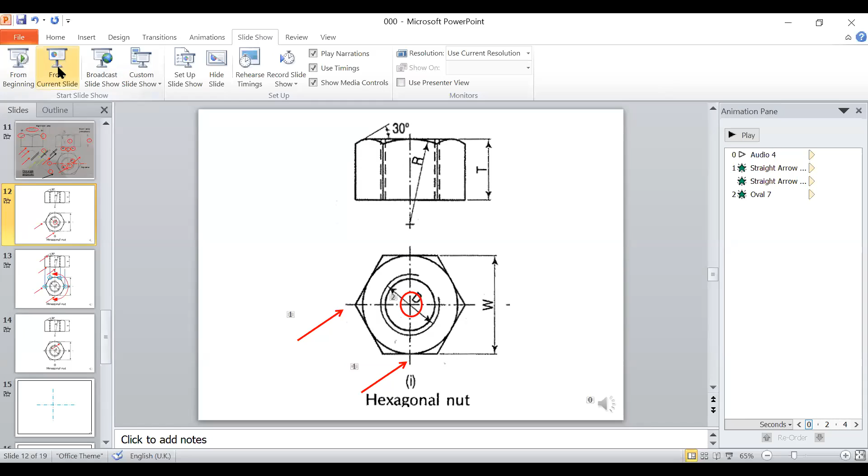Well, in the following slides, I'm actually going to illustrate how a hexagon nut is supposed to be drawn. A nut and a bolt is in fact one of the most important members of any mechanical assembly and is going to be required to be drawn in practically all of them. So the students may kindly note how this particular thing has to be drawn.

The first thing is we are going to start from the top view. We are going to draw the two axes in the top view, and obviously these two axes are going to be intersecting. So the axes have been drawn corresponding to the convention used for central axis. Therefore, it consists of a long hash, a shorter one, then a longer hash, and so on. Kindly note that these two central axes are intersecting corresponding to their longer hashes. This in fact is one of the sign conventions and it has to be properly taken care of.

Now once these two axes have been located, the position of the nut is going to be fixed in the top view. It cannot move left, right, up or down. Well, the nut in the top view cannot move in the left, right, top or downward direction. But it can very well move along the vertical axis passing through its center. This vertical axis happens to be perpendicular to the two central axes which have already been drawn.

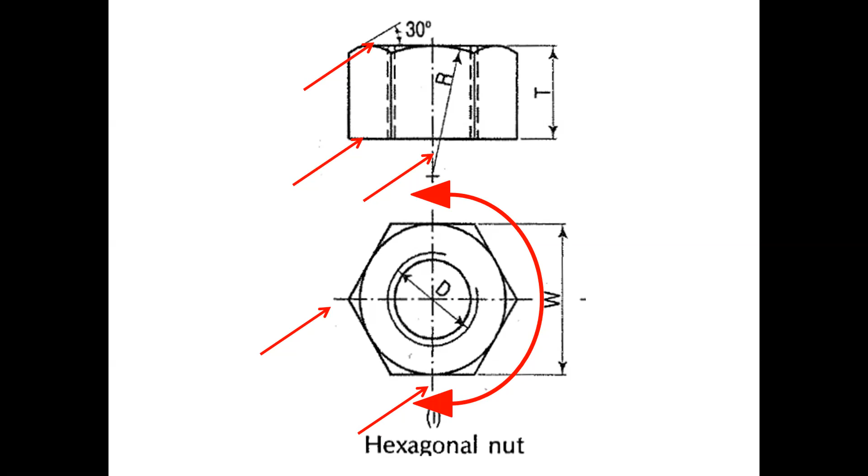After this, the rest of the construction is easy. We complete the top view first. We draw the circle around which we draw the hexagon, which is going to give us 6 corners. These 6 corners are supposed to be projected from the top view to the front view by drawing the projection lines, and with the help of these projection lines, the front view is going to be completed. In the remaining slides, we are going to discuss all these points and construct these two views to illustrate the drawing steps in detail.

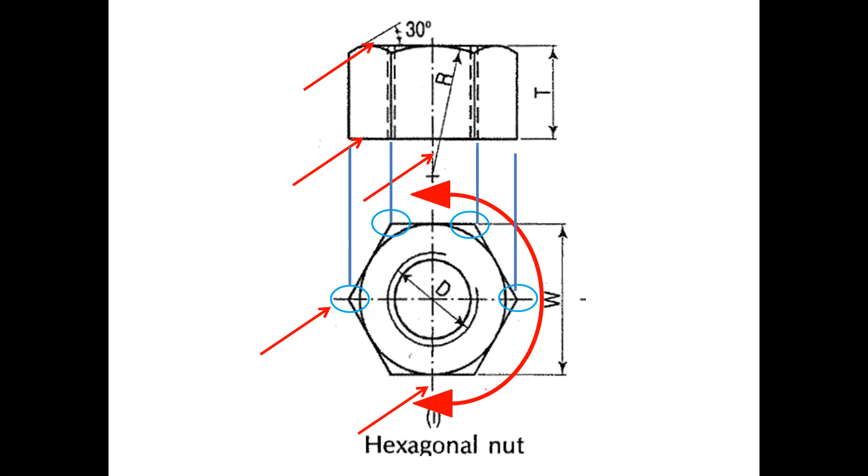Now in machine drawing, if you are expecting a grade of A or A plus, you should really come up with a clear drawing, for which you are supposed to take some precautions. One of the precautions I have been insisting upon is that construction lines, projection lines, dimension lines, all of them are supposed to be drawn with light intensity, while the darker intensity is reserved for the actual presence of the part.

If you can make it out, you can see that the hexagon has been drawn with a darker intensity. It happens to be slightly bold also, while the dimension line happens to be a thin line. Obviously, since this happens to be a printed copy, we cannot really differentiate between the two. But this is how it has to be done when you are making a drawing in the drawing sheet.

Now the second thing is, it really helps to know before actually making a drawing which part is going to be visible and which part is not going to be visible. For example, let's talk about the circle over here.

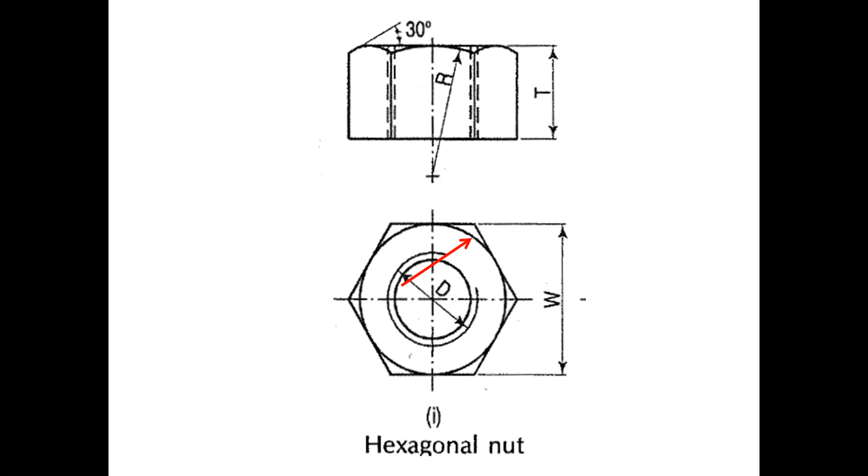This is how we are going to proceed with the actual construction of the hexagon, which is going to be illustrated in the next slide. Now the first step is to draw the margin, which in fact is going to act as a reference point to set the drafter if at all it is disturbed during any process of drawing.

After the margin has been drawn, the next step is always going to be to draw the two central axes, so our first step is to draw the horizontal and the vertical axis, which we just discussed in the previous slide. So these are the two axes. They are in fact the central axis, therefore they have been drawn with alternate long and short hatches.

And kindly note that these two axes are intersecting with respect to the larger hatches, and the color code happens to be blue at this moment, just to indicate that they happen to be central axis, therefore they have to be drawn with lighter intensity.

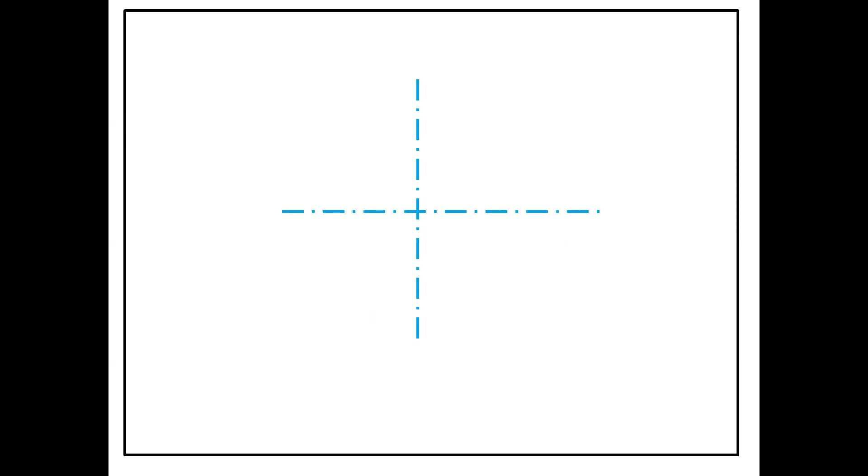It was also mentioned in the previous slide that there happens to be a circle whose diameter is known, and the circle is actually going to be visible in the final solution. Therefore, we draw a circle whose center is where the two axes are intersecting. The circle has been drawn with a black color to signify that this has been drawn with darker intensity.

Now once the circle has been drawn, we are now going to follow the steps for the construction of the hexagon. Since the length of the side of the hexagon is not known, we are actually going to follow a geometrical process of making the hexagon, and that particular hexagon is going to be indicated in red color, just to signify that it is a construction line, therefore it has to be with lighter intensity. I am repeating myself over here.

We have the two axes which have been drawn as a first step. The axes are known, in fact they are imaginary, but axes happen to be the first step which have to be drawn. Therefore, we draw the two axes. They are blue in color, signifying that they have to be drawn with lighter intensity.

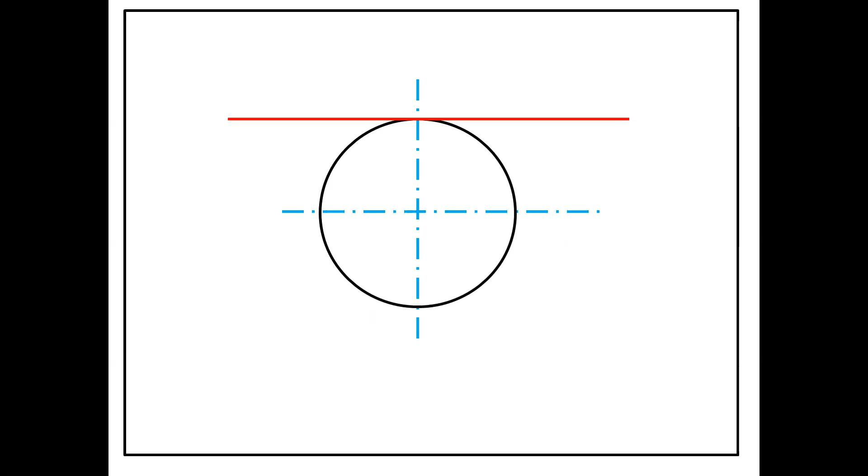Now, once this particular line has been drawn, which represents one of the sides of the hexagon, we move the drafter parallel to this particular line and draw another line tangent to the circle at the bottom side. This signifies the second length of the hexagon. This too has been drawn with a larger length, since we do not know the actual length of the hexagon.

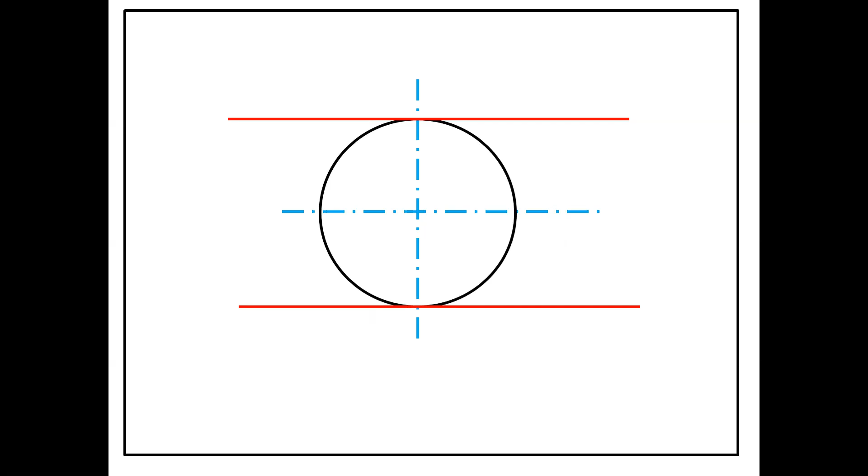Now, since the interior angle is known, we adjust the scale of the drafter with respect to the interior angle, and then make another line which also happens to be tangent to the circle.

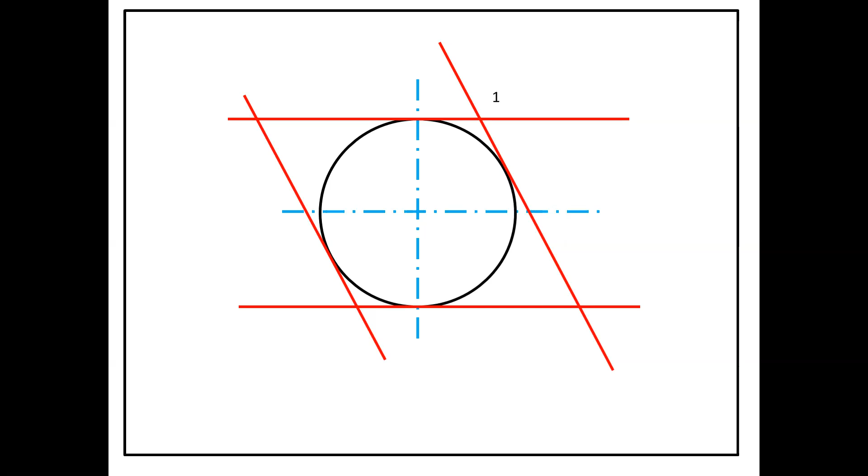Now, these two lines, that is line number 3 and line number 1, intersect at a point which gives one of the corners of the hexagon. Now, once line number 3 has been drawn, we move the drafter parallel to this particular line so that a fourth line tangent to the circle is drawn at the opposite side. The moment this particular line has been drawn, line number 4 and line number 2 intersect with respect to each other and give us point number 2 of the hexagon.

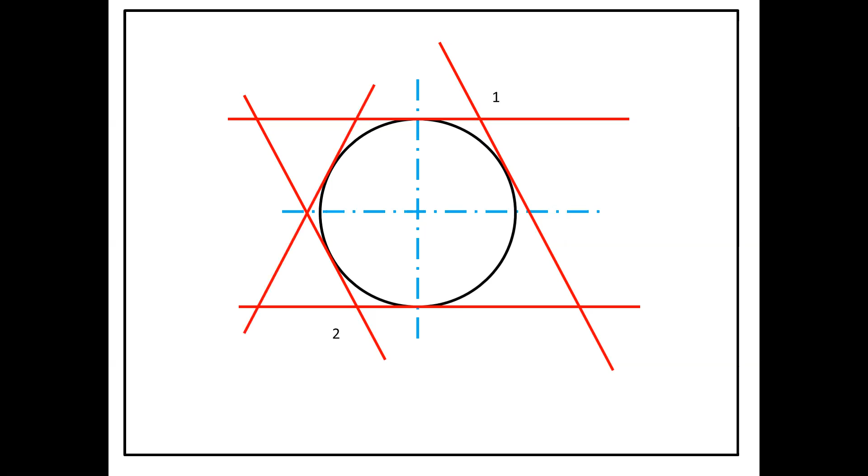Similarly, we readjust the side of the drafter once again to draw line number 5 and line number 6 of the hexagon. Now it can readily be seen that the 6 sides of the hexagon are intersecting with respect to each other to give the remaining 4 points of the hexagon. 2 points of the hexagon have already been located, while the other 4 happen to be point number 3 over here, 4 over here, 5 over here, and 6 over here.

Now, once these particular 6 points of the hexagon are located, we are now able to visualize the actual hexagon present around the circle, that is from 1 to 3, 3 to 4, 4 to 2, 2 to 5, 5 to 6, and back again to 1. So from point number 1, 3, 4, 2, 5, 6, 1, this happens to be the actual hexagon which is supposed to be darkened. Therefore, this is going to be darkened now. The rest of the lengths of the line, since they were part of the construction line, are going to remain as they are and are not supposed to be rubbed off.

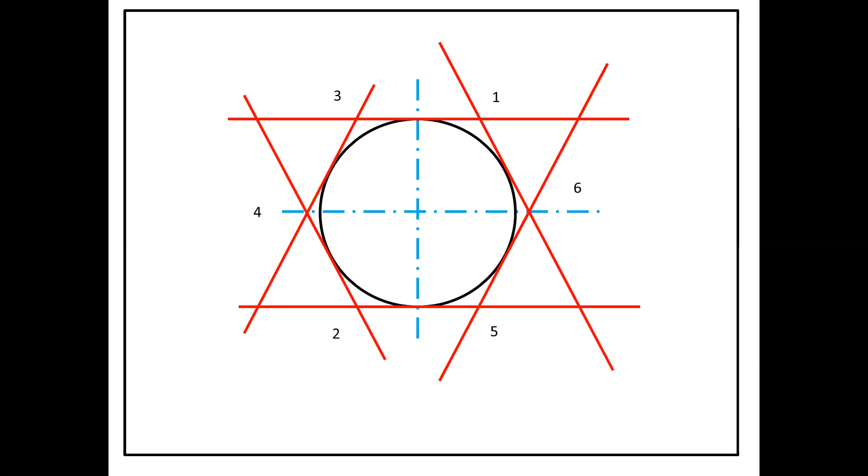Now this is what the solution is going to appear like once the hexagon has been darkened. Kindly note that the hexagon and the circle have been drawn with lines of unequal thickness. They are of the same intensity, but they are of unequal thickness. This is just for the illustration process. In actual, they are supposed to be of equal intensity, equal thickness. But still, this is how the figure is going to appear once the figure is over. The red portion of the line, which represents the construction line, is going to be present even after the final solution has been achieved. They are not supposed to be rubbed off.

Now coming to one of the checks of the problem, supposing the entire solution was done correctly, it obviously is going to result in a hexagon which is symmetrical in nature. Therefore, if you draw a vertical line passing through point number 1, it is also going to pass through point number 5. And similarly, if you draw another vertical line passing through point number 3, it is also going to pass through point number 2. These are some of the checks which you can use to see whether the hexagon you have drawn is correct or not. In fact, these are some of the steps which we also use for the evaluation process.

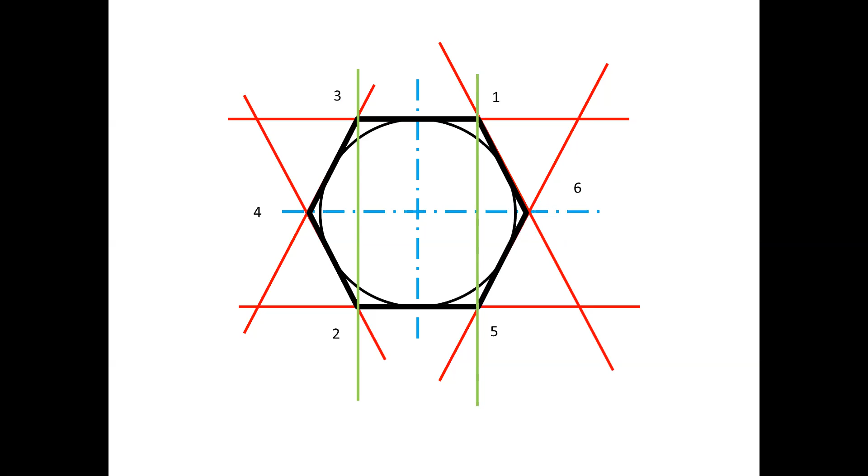view at the top. So all what we have done so far is we have drawn the axis, which means that the figure which has to be drawn in the top cannot move left or right, but it can in fact move along the vertical axis. Now the figure is going to be constrained the moment we draw the bottom line of the nut, and since we know the thickness of the nut, we are able to locate the upper line also.

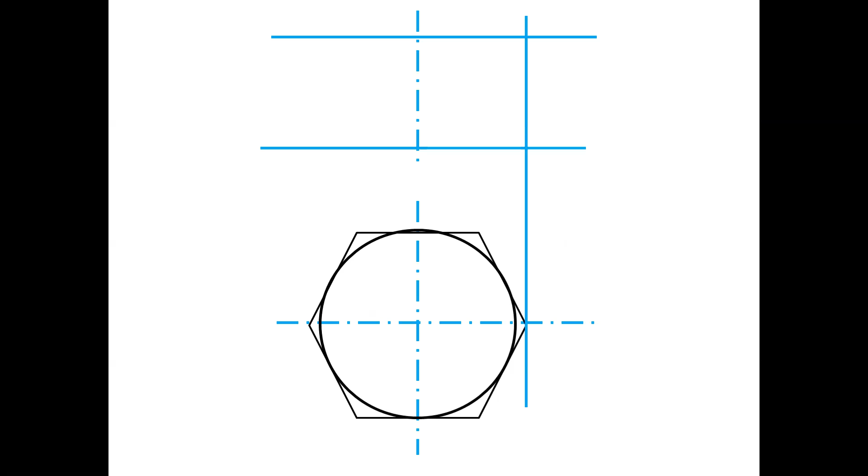Now kindly note all these lines which have been drawn in blue happen to be the construction lines and central axis. Therefore, they are supposed to be drawn with the lighter intensity. Now, after this, the 6 corners which have been located in the hexagon need to be projected to the other view. So this is the projection line for the first point. This is the projection line of the second, the next projection line, and the last projection line.

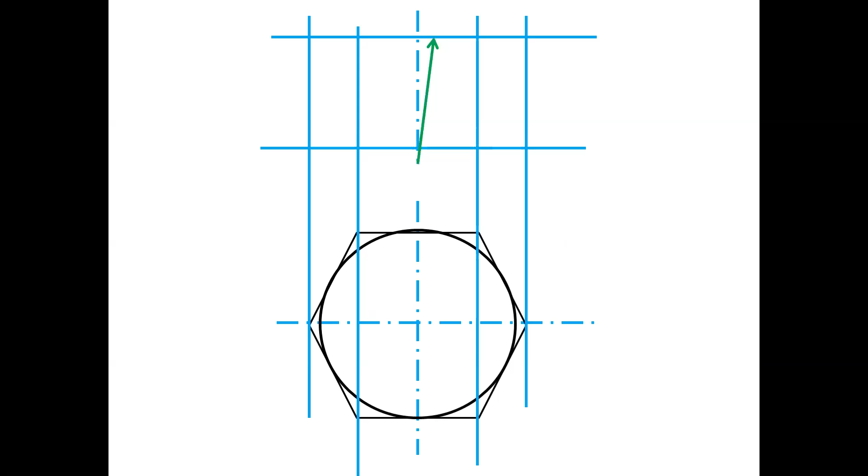Now coming to the circular arc which has to be drawn in the face of the hexagon located in the center. Since the radius of the arc is given, we actually locate the center of the arc and draw the arc. This arc which has been drawn in black actually exists since it is part of the nut. Therefore, it has to be drawn with the dark intensity the first time it has been drawn.

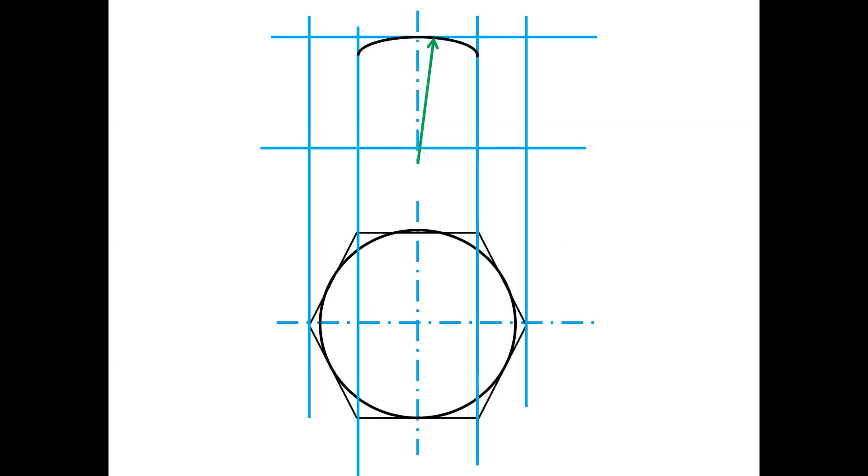This arc which has been drawn with black intensity intersects with 2 of the projection lines. Therefore, it gives this and this as 2 additional points. Now, if you draw a horizontal line passing through these 2 points, they intersect with the vertical projections at this and at this particular point.

Now, kindly note that we are now going to draw the arc in the right face of the hexagon, for which we have located 3 points: 2 points on the vertical axis, and the third point in fact lies in the center. So since it's a geometrical property that if 3 points of an arc are known, there is going to be only one arc which can pass through them.

But since you do not know the radius of this particular arc, what we do is that we use the trial and error process. We use radius of different values such that an arc is obtained which passes through these 3 points, and after some trials, we will be able to locate this arc in one of the faces. Similarly, we can locate the arc in the other face also.

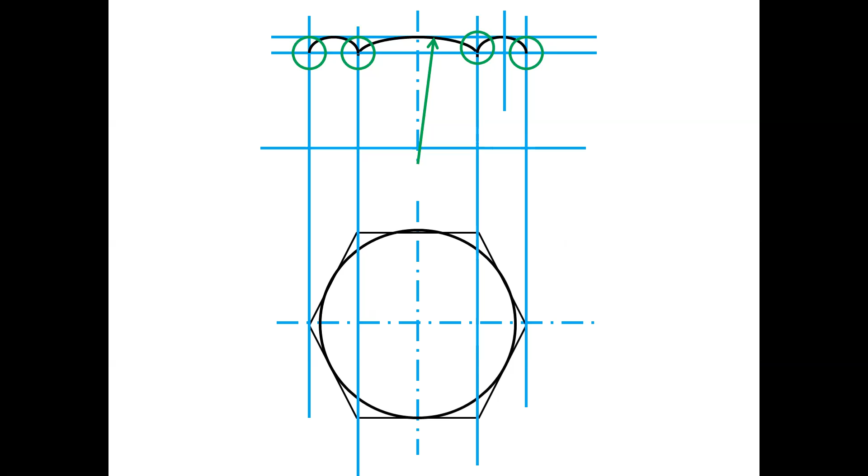Now this is what the final drawing is going to appear like: a dark circle and a hexagon around it, also in dark intensity, in the top view, which has been drawn according to the first angle. Therefore, it is located below. Now, corresponding to this particular view, we have the front view, which has been located in the top.

So we have a dark black line, horizontal black line, corresponding to the lower edge of the nut. Then we have 4 vertical dark black lines corresponding to the 4 edges of the nut, and 3 arcs also with dark intensity corresponding to the upper surface of the nut. This very well completes the 2 views,

except for a minor detail which the students occasionally miss. That is a dark continuous line which is going to appear on the screen just now. In fact, this line is one of the errors which is committed by most of the students. It is always supposed to be drawn